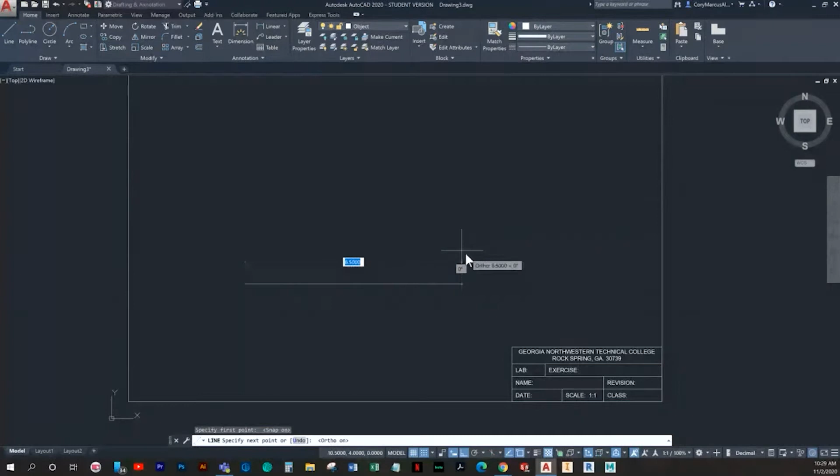We'll start about right here. Make sure ortho's on. It's going to be 11 units over, but because it's a 1/2 inch, you can say it's 11 divided by 2, which is 5.5. In that same vein, we know it's 6 up, aka 3 units.

I'll draw that little cutout in a minute. We know it's 2 from the end, that slant on both ends, and it's 3 over to here. I'll just trim out the excess so I don't have to waste time fighting my snaps.

Okay, so the next part says to use linear dimensions and then aligned dimension as well. So we'll just dimension the straight lines first, and then the last one we'll do will be that aligned value.

It does say to change the dimension decimal value, so we'll go ahead and do that. I went to the annotate panel, hit the little arrow, modify, and then in primary units we will change that from 0.0000 to 0.00.

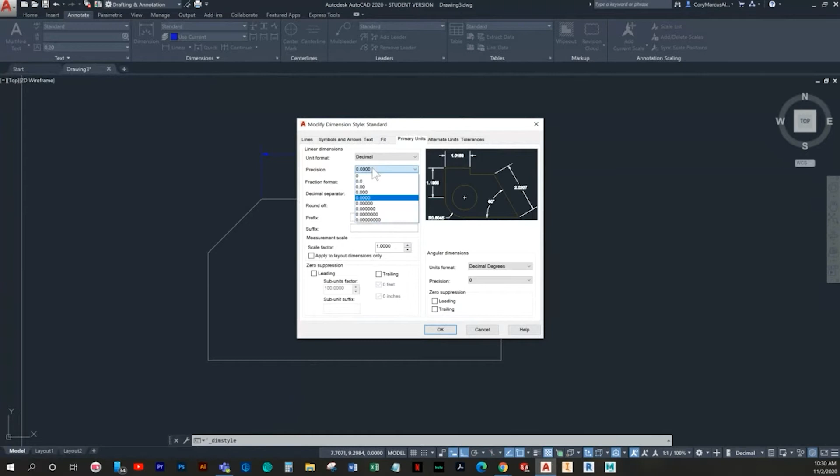Now as we slap these in, they will have the proper decimal value. I'm just going to go through and slap these in, and I'd advise, like I'm doing here, snap to the other dimensions to keep them perfectly in line. It's a little more clear when you're taking the time to actually align things.

So then we've got this value, and yeah, that's actually it for exercise 1. Let's flip on over to the next one.

This one's going to be covering baseline dimensions mostly. In the same vein, we're actually going to do more grid drawing, so I'll do the same changes again and do 1/2 inch here. We've got the 1/2 inch there.

Turn on your grid snap, and let's start a little further over. Let's do 4 again. Okay, so it's 3 units over, 1 unit up, 3 over, 1 up, 4 over.

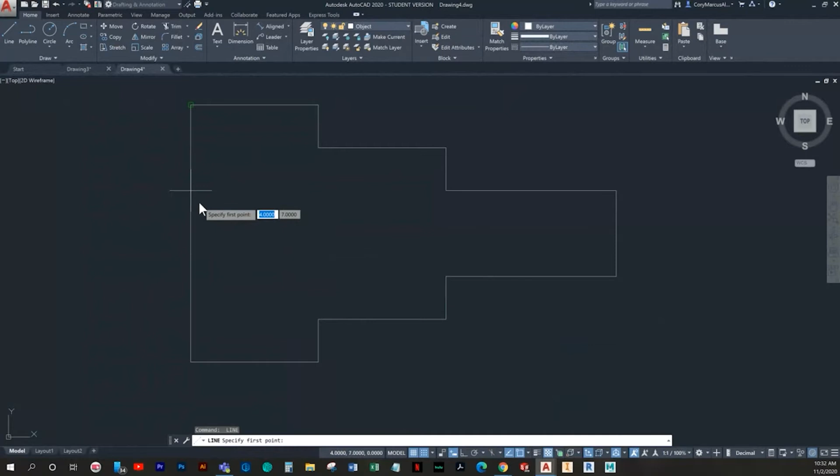Okay, and then we have from the middle, which if you don't have your snap set right, you may end up getting that midpoint nonstop, or endpoint. That's okay, you know what, we'll start one over and just trim it.

So from the edge here, it'll be 4 over, 2 down, and back across. So now I'll just trim this.

Okay, so then we'll do the points, which are 1 over, and change this to hidden. Let's see, you know what, I didn't realize it, but this line should extend all the way across.

Okay, so now we'll do our center line. I'm going to turn off the snap first, it's getting a little irritating. I'm just going to choose 2 lines. I'm still going to have to manually adjust it, but now it's a great time to have midpoint.

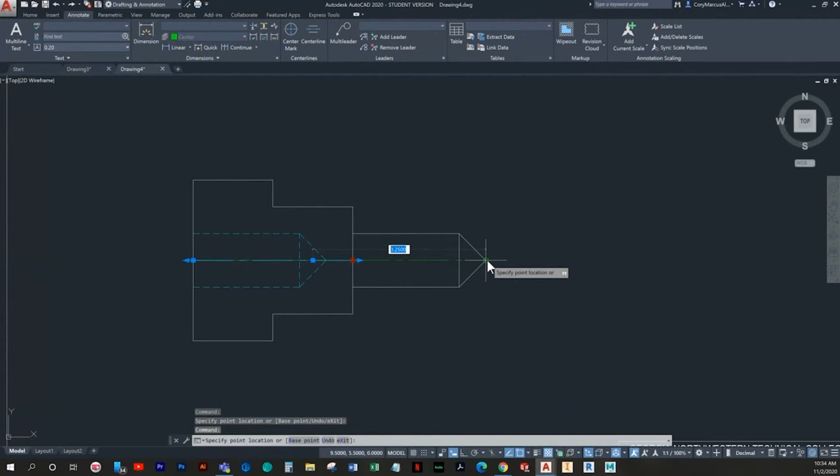So make sure you're grabbing the square grips, pull those to the end extents of the part, and we will be doing baseline dimension here.

Which I'm not seeing, let's see if it's on the annotate tab here. There we go, okay. So it says dimension the top half and bottom half, basically.

Okay, so this will be our base one. Then I believe we'll just choose this. Okay, that's fine.

Select base dimension. Oh, you know what, I believe you have to add one first. I'm not going to use this one a lot in AutoCAD, pretty clutch in Inventor though. I used the wrong layer.

Let's change that, okay, baseline. Yeah, okay, so once you have put down a dimension, then choose baseline, it automatically grabs that first selection. And then I can click here, and here. Okay, and hit escape.

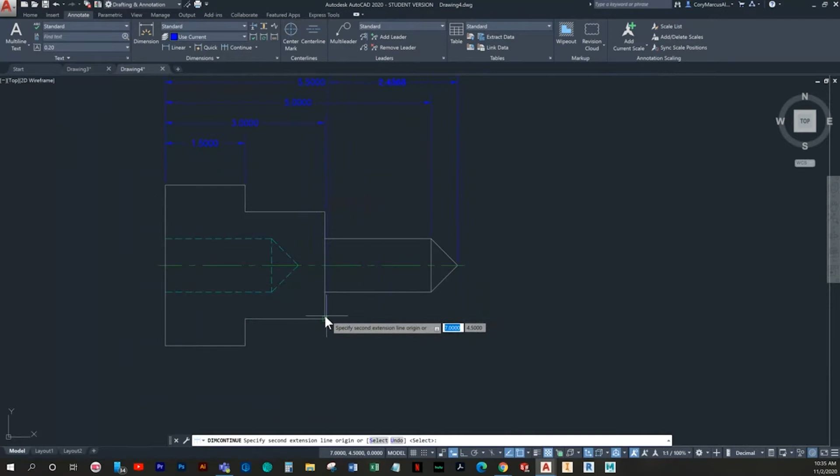And then it says to use continue. I can't say that I'm actually familiar with it, but let's see how it works here. We can just click here, here, here, and here. So I did them all on the top, let's undo that.

Okay, so how about we do another dimension like we did before. Let's do continue after that. Yeah, so once you hit continue, what it does instead is it dimensions the next portion. We can click as we go, doing the same process down here.

You're not really supposed to dimension the hidden lines, but if you want to include that, that's fine too. I'm just going to slap one in here generically so it's out of our way. I'm not going to nitpick how you go about that one.

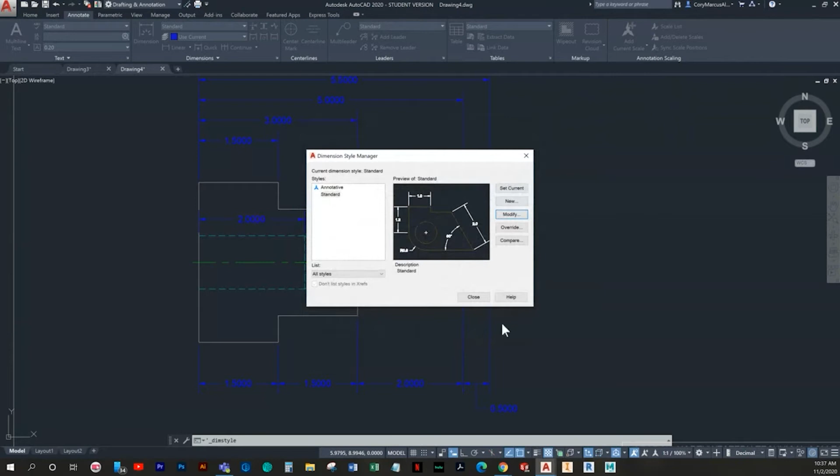I actually don't really like dimensions being on the model either, but since you have dimensions on both sides, you're kind of trapped here. If you want to change the units to save a little space, 2 units is clearly fine. Really, 1 unit's fine because you only have up to 0.5 regions here. So that looks a lot better, obviously, versus that.

Okay, moving on. We got another grid drawing. All right, so exercise 3 is going to be the same way.

So we'll start over and do the snap settings as we did before. Oh, but you know what? Now that I'm looking at it, we actually need to have our snap spacing able to go down to a half unit because technically sometimes these lines are 1/4 inch apart instead of the 1/2 inch that our grid is. Okay, so let's put on our ortho.

And we'll start it, let's see, how about at 4:4. Okay, so we will do 5 units over, which is 2.5, and then it's going to be 2 units to the right. Make sure your polar's on. And then 1/2 unit up.

I know if you're having problems with the snap, in the past I've had issues. Sometimes you need to turn off your object snap tracking because it wants to project all these different things. And if you're having issues still, turn off intersections. This one I've turned off because in the past I've struggled with it. Sometimes AutoCAD thinks it knows what you want, but it doesn't.

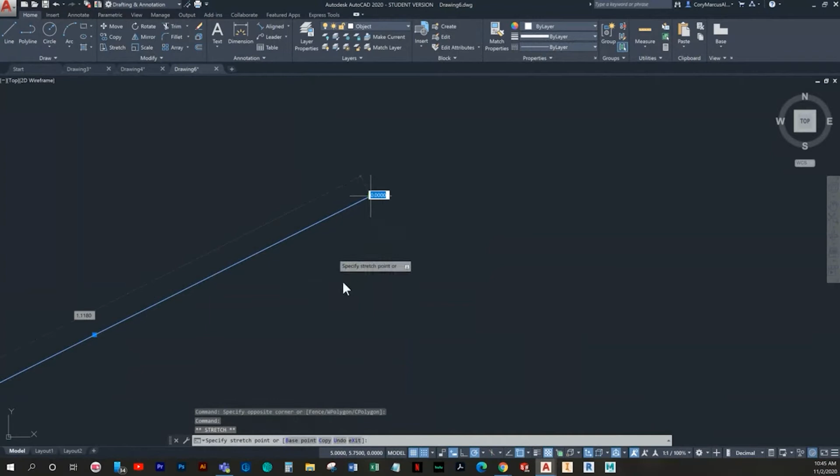I always double check. You see what happened there? Same thing I was just talking about. It wants to just do what it wants sometimes. For the sake of testing, I'm going to move this out of the way. Let's see if it would snap right to it. Yeah, so check those angled ones.

For whatever reason, it's easier actually to start here and draw over, because then it can't try to project it based off your earlier line. But sometimes there's some quirks, the system's not perfect. We'll do 1 over, 1 unit up, and that's going to be the first portion of it. We'll mirror the rest of it after we do this.

So we'll jump back over here, and it's going to be 1 unit up, and it appears we may have the same problem. Keep an eye out when you're looking at your dimensions. Mine was showing 5.006, which means that it had already snapped wrong. Be very cautious drawing these slanted lines.

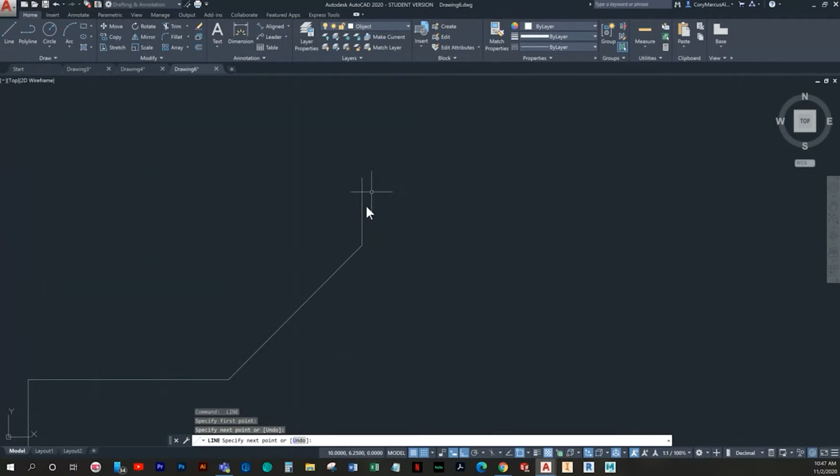So that being said, I'll jump back into it and go 1/2 inch over and 3 units over. And I'm going to play it cautious. Instead of trying to draw and it potentially ruining my life again, I'll start over on this side. So it's going to be 2 units over and 2 units up. So 1, 2. We'll snap, and then it's 1 unit up to the end, and this line should connect perfectly here.

Now this isn't the center. But what I can do is mirror this portion across this line. Well, let's see, we'll have to mirror and move it, but still, it'll be less work. Okay, so I'll mirror it, and I missed the line, but that's fine. You can still see what I'm going for here. I'll delete this.

I'm going to move this into place. Sure, it wasn't perfect, but in the end, it does line up. We've got our line there, no duplicates. I actually didn't need that line I copied, but we saved from having to draw that whole thing again. Okay.

So the next thing we need is some angle dimensions here. First and foremost, I would definitely get the units to show 2 decimals only, if you don't have it set to that already. And hop on the dimension layer.

You know, actually, had I had the foresight, I would have put the dimensions in and then mirrored it, so I wouldn't have to do all that again. But, you know, sometimes hindsight's 20/20.

So we'll just slap all these in. Although it seems silly to do every angle, we'll do it to humor the book. Technically, there's really better ways to go about this.

I'm going to do complementary angles here, probably, just because of space. And it's still pretty gross. We'll do it like that. I don't like it, but, you know. Again, this is kind of a space-consuming way to go about it.

And, you know, depending on which option you choose first is what it chooses to flip. Actually, kind of like that. Let's see if we can do the same with this one. Yeah, let's do that. Not too bad. And I hate it, but it's definitely better than the other options.

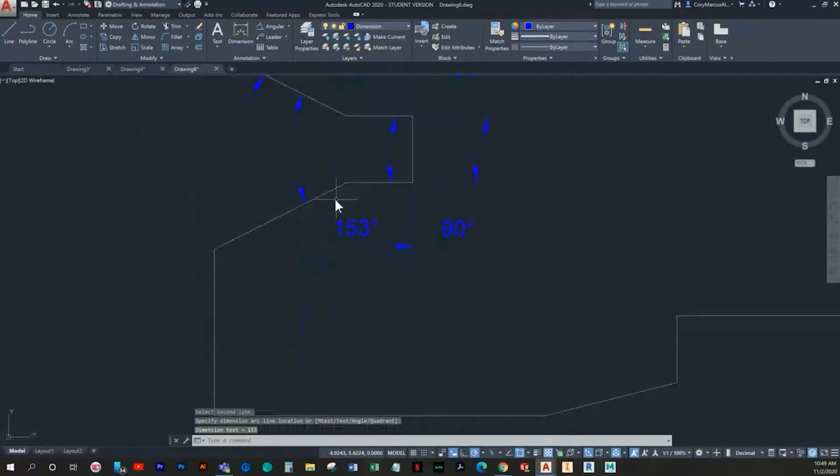Pretty straightforward, you know, just click, click. As long as you click those 2 lines, it'll give you that. And technically, you can use this dimension tool, and it would do the same. It's just it tends to be very versatile. So you get a lot of selections out of it because of that.

And I'm going to do a complementary angle here and do outside to save space. But you know, because that tool does so much, it'll snap to endpoints and midpoints, and it's easier for stuff like this just to go ahead and use the actual angle dimension.

Again, this is kind of a scene, but you know, we're committed to the rules of the book. All right, so there's all of our dimensions in all of their entirety. So let's see which one's next here.

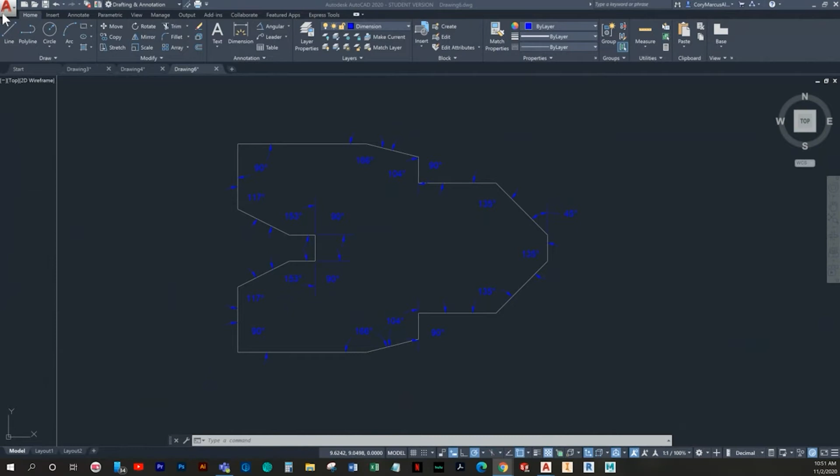Next we have exercise 4. And it's also drawn on the grid. Wrong template, that's okay. I like to do most of these on a B, it just seems to be pretty perfect.

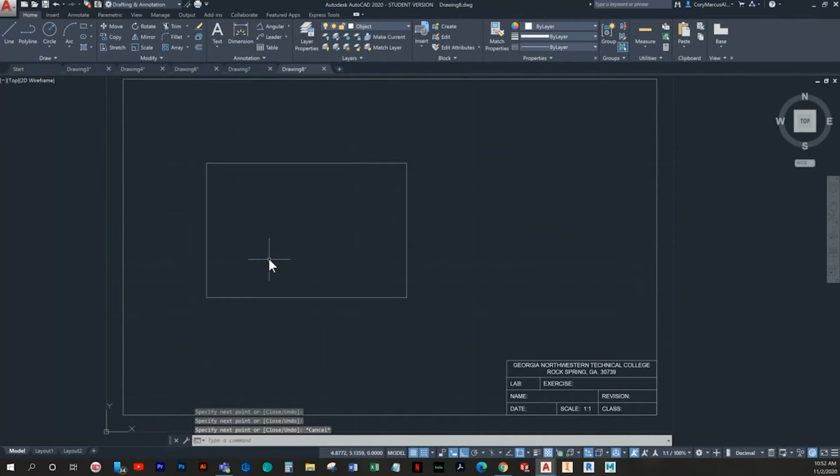Now we can draw our circles. This one is going to be 2 from each end. We'll just copy that. And it's going to be, it appears the same position everywhere, so that's kind of convenient.

I'll double check that. Okay, cool. And again, we need to have this snap set to 0.25 for these little holes. Okay, so 1 unit over from this end is the center.

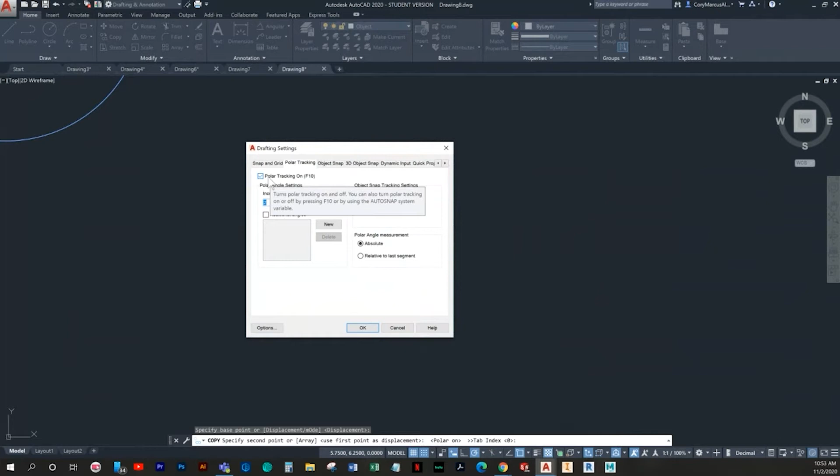So there's that guy, and then I'm just going to copy it down and over. I mean to tell you, this tracking is getting old. Well, we'll just turn off tracking for a minute.

How's that? Okay, so down and over 1. It's going to keep being down and over 1, so we can just casually click. And just to make sure that tracking is not messing with us, we'll just select each of these and go through. All of them look like they line up. Cool. Okay, so next,

it says to do ordinate dimensioning. And you know, it might be here. I like to try to stay on this panel if I can, just because this is where all your goods are. Specify feature location. Okay.

So this is going to be our starting point, I believe. Let's double check that and see though. Undo.

So I'm trying to specify these are our datum points, but let's just see if that works out as intended. So we just did, crap, I can't remember which one I hit. So this should be 4, 3, and that's 3, 4. Okay, so let's see now if it goes through and dimensions these like it should.

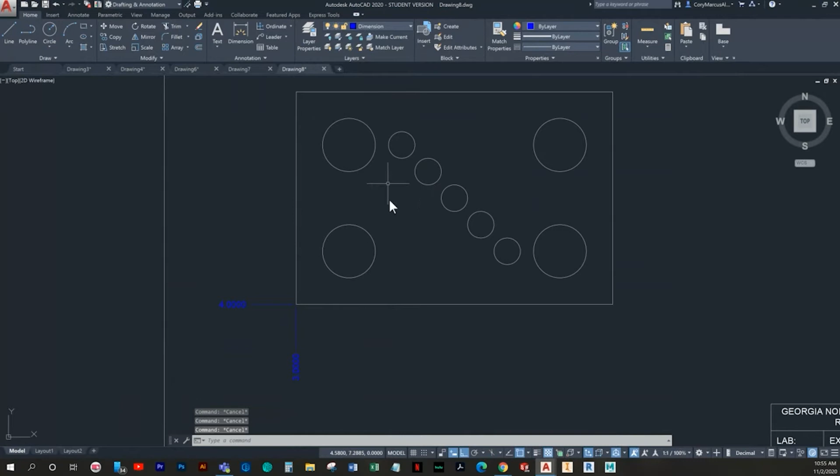Cool. Okay. So, one thing I would advise you to do, besides putting these on the correct layer, which I did not do, is to put center marks in. Ah, wrong layer.

You know, I'm actually sitting here thinking, I believe you don't even have to specify datum. I think I can choose here. And then if I immediately just go ahead and do another one, it does. Okay, so ignore what I said about those dimensions. We'll get to that.

But for now, put on the center marks. The reason being is, obviously when you're detailing, you shouldn't just have random holes. I know it doesn't show it in the book, but you've got to have center marks. How else do you know that it's actually a true circle?

So you could dimension it every time, but I'm not going to. I'm just going to dimension the essentials here. And granted, I'm putting most of these on the left because obviously people read left to right, so it makes more sense to have as much data on the left side as possible.

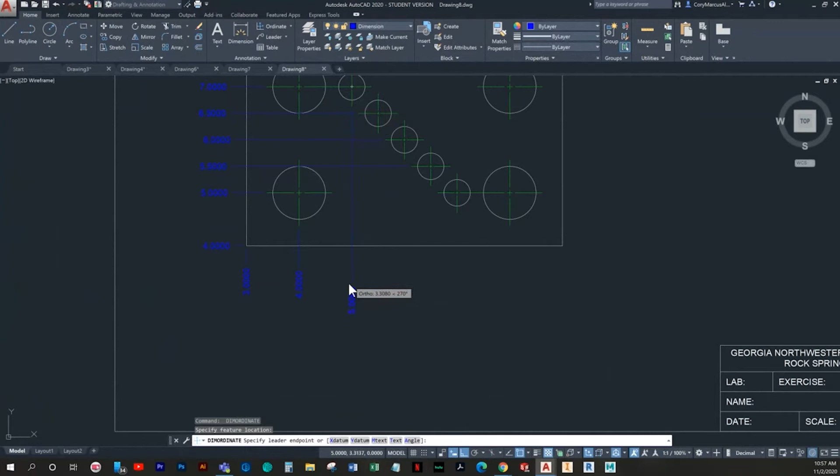Got to do this circle. Notice that I'm also choosing the ends of these points, not anywhere else. That's very crucial because if you don't, you end up having your layers overlap, and that's obviously a big no-no. So keep in mind what you're doing as you're doing it.

And to try to be fun, let's try a different command here. I've seen a few times this DIMDEC. You see that there. So what it does is it actually changes your layer style, I believe.

Maybe I have to select stuff first. Let's check. Nope, okay. I bet you what it does is it does it for a new one. Yep, okay, so that's kind of lame. So I really don't advise using that at all then.

I was trying to be cool, use something new, but yeah. All I did was create a style override. So what we want to do is change our primary units to two manually after, and that should fix that. It didn't, okay. This is why you don't use overrides, needless to say.

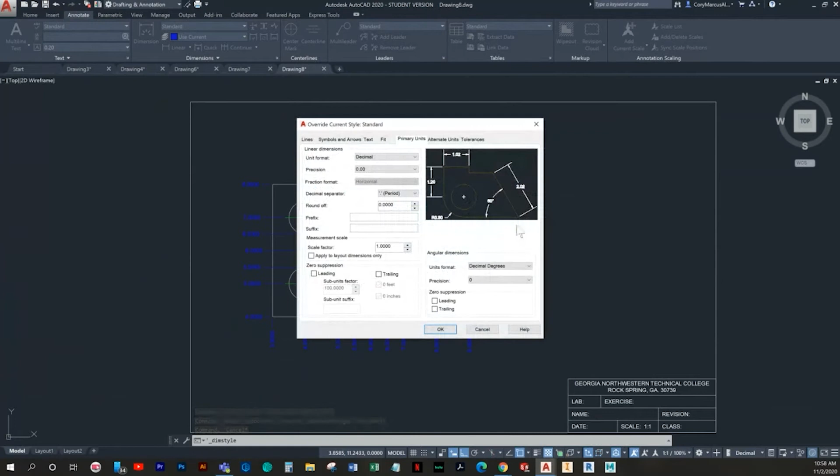Okay, so how to fix the override? Undo a few times here. Okay, don't do DIMDEC. Add stuff. So now I'm going to go in here, modify, how you're supposed to do it. I can't believe the book even mentioned that. It's terrible practice. So anyway, yeah, bam.

Now, I don't know if it says to, it doesn't, but you should dimension your circle still. So do that, and I'd preferably do it the right way. Put a quantity in there: 4 of those, and 1, 2, 3, 4, 5 of these. Notice the formatting there: it should read quantity X and then the size.

So there's exercise 4. So let's flip over and look at 6. This one is also going to be inches.

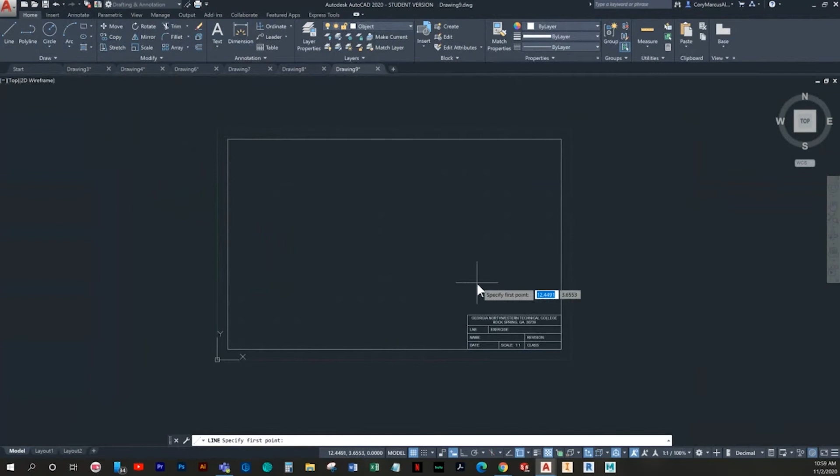Finally, we're not using a graph. It shows it, but you don't have to actually use it. I will use it just to get my location here. I kind of like 4, 4. We're just going to keep committing to that until we don't have an option there.

All right, so we've got a 5x3 rectangle. If you've been doing the same as me, you should turn on your polar tracking now, or your snap tracking.

The way it likes to locate everything is through center lines, so I'm going to do some generic center lines for the sake of construction. Then we know that each of these 4 circles is 1 inch from that center, so 2 inches between. And then it's 0.5 from the center to the other part of that circle, aka 1 total. I'll delete these to make it a little more clear.

These are going to be diameter of a half circles. And we'll need our intersection back on. So now I'll copy it and paste it around.

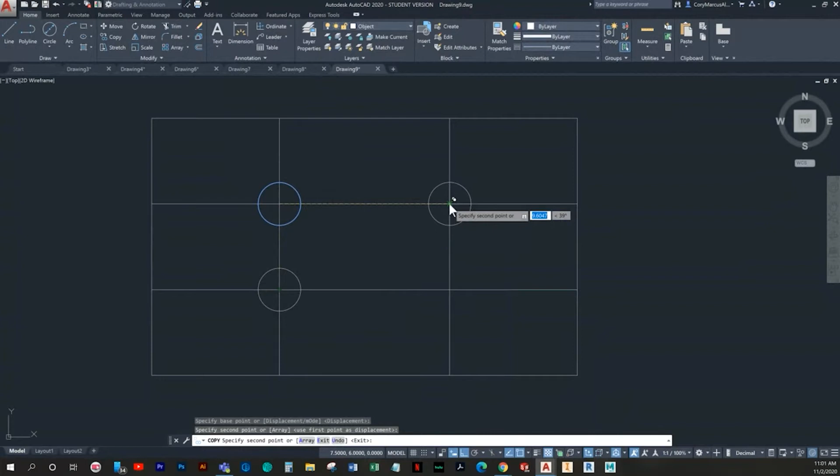And I already deleted our center line, so we'll just offset from the outside to get these other circles. 1/2 inch, because it's 2 inches from circle to circle. So obviously 3 minus 2, divided by 2, equals 1/2 inch here. And it's actually going to be 1/2 inch the other way too. Isn't that convenient?

And unfortunately, I drew these circles the size of what the other one should be. So we will use 0.25 diameter circles here.

And once I draw one there, I'll just move it over, I guess. Kind of inconvenient, but I haven't drawn these before. I'm just doing them on the fly.

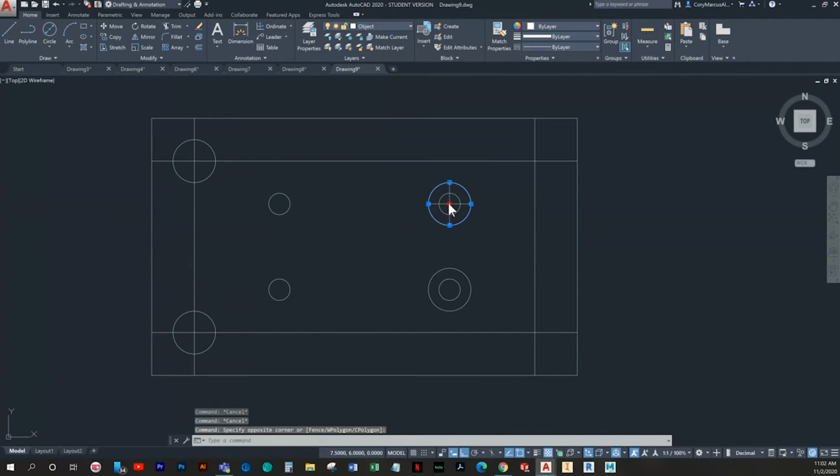So once you get those little replacement guys in, put those in. And then we can delete out this junk. Okay, should have noticed that. That was my bad.

And instead of having to redraw this line, we're just going to use the projection here. Let it snap for us. And that is 1.

Okay, so at this point in the game, you do not know what thread sizes are. But what it's calling out there is a thread call out, which is why you see a second circle on top of it.

You don't know anything about roots and crests and all of that. So for now, I'll just put a generic dimension of 0.375. When time comes, we'll talk all about threads and you'll understand what it would actually be. But this is a nice placeholder and it looks like it'll appear fine.

So we'll change these to hidden lines because technically there is a thread in there, and you would see it as a hidden line. So a little big, but it's an easier number.

I guess I could try one more just to see, but 0.3125. That'd be a little better, I guess. Okay, so take it back. Let's do 0.3125.

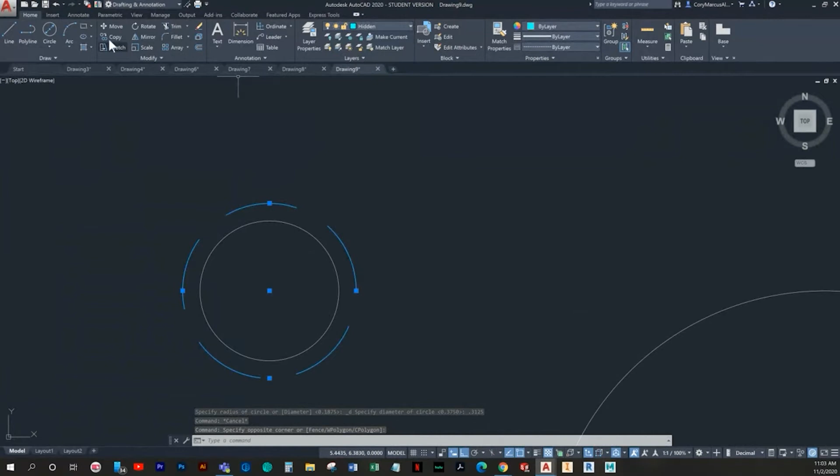So we'll copy it. Okay, that's better. So now we'll do center marks.

We'll still use the biggest circle in this case. You always want to use the biggest. So choose the hidden lines. Okay.

Now to dimension. So we want to dimension just like the book. So we'll grab these endpoints of the center marks.

And let's go ahead and change the dimension values here. It appears that it varies between 1 and 2, but we'll just set a blanket value of 2. Just that'll cover everything, and we can adjust it to match after. So got the 2, and then we have 5.

We have the 1 dimension, 2, 4, 3. Let's see.

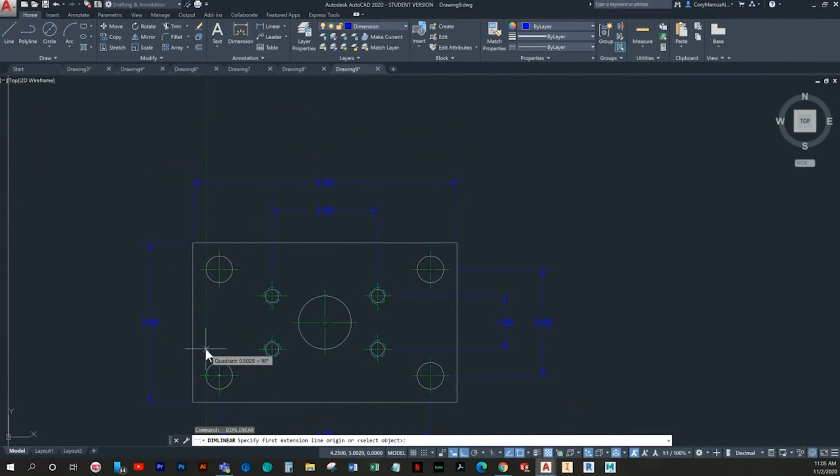That's pretty much it. Okay, so what it says to do for these is to do a QLEADER. Now I have one problem with that, and I'll show you just an example.

What I would rather you do in order to give some actual substance to what you're detailing is to dimension it. And then in this case, you actually retain some information too. So we can then type in drill and ream. I can't tell for spaces, but we'll see.

And then we can do alignments if needed. Let's see, it would be middle right. But so what you get out of that is this value, like it's giving you a true value. You're not having to type it in and mess it up. You're not having to cheat the system or anything. It just is what it is.

And also, placement wise, as you know, the dimension always stays true to that axis. So it's going to always be positioned well. So what I would rather you do instead of doing a QLEADER here is to actually go in and dimension these like you would normally.

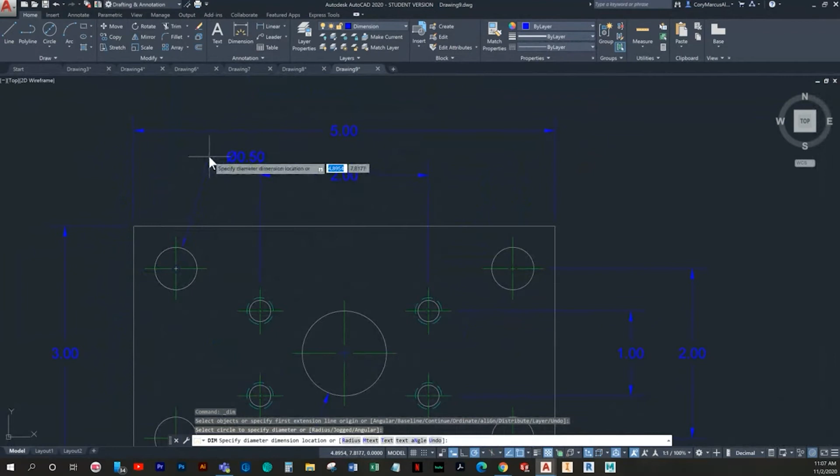And notice I'm using a dimension tool. It's kind of quick with these. But then go ahead and just type in that information. And all you need to do is make sure you don't have this portion selected.

Notice it's dark colored. When I hit left or right arrow to get away from it, it goes live. So if you're having problems with deleting it, just make sure that you aren't on it. When you edit it, by default, it's not on it. It's when you click to try to type, because you don't want to type over and then lose that dimension. That's no good.

So we'll undo that and then type in again, drill and all caps. Don't forget, drill and ream.

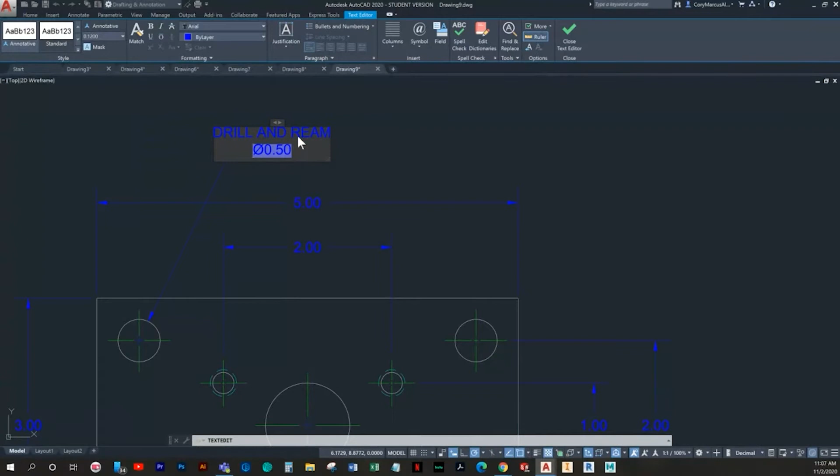And then this one has the quantity 4 times and that. And you know what, this one's also going to be middle left.

And then we've got this guy. It's hard to tell, I think it's dimensioning this one. Actually, it'd be preferable you dimension a small one anyways, because otherwise you're going to get that 0.3125 dimension.

So, drill and tap. In case you're wondering, tap means to actually add thread into a hole. We'll talk about that more later, but it's good to know what exactly it means when it's using that jargon.

Let's see, do we have a space there? Add a space... okay, actually there's not supposed to be a space, my bad. When you're looking for that symbol, you just choose the symbol drop down, choose GDT, but I already did it. This is the font where all these special symbols that drafter people use is going to be. We're looking for a little... there we go, that guy. So we'll select it, and then it's going to give us the option down here to copy it.

So then I will paste using Control V, and then type in 0.5. Now do you see what happened here? This all is Arial font, but unfortunately this part shifted to be GDT. You have to be careful when you're putting these symbols in to keep your font the same, because it looks funny. So a lot of people, what they'll do is they'll add in these symbols after they're done typing to avoid that. But if not, make sure you're going back and changing the formatting to match this over here.

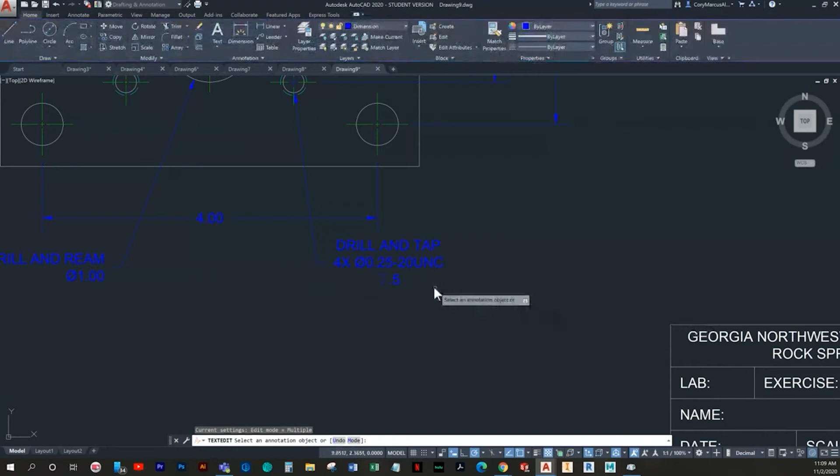You also need to change both of these to be 0.12. It's kind of a quirky thing, but you really do have to be very cautious with that, because for whatever reason AutoCAD's just not really intuitive enough to do that on its own. So, and you know what? This one is also left center, left, whatever.

Okay, so hop on over to exercise 7. This is where the fun begins. Not this one necessarily, but the back of the book exercises are always a little tougher.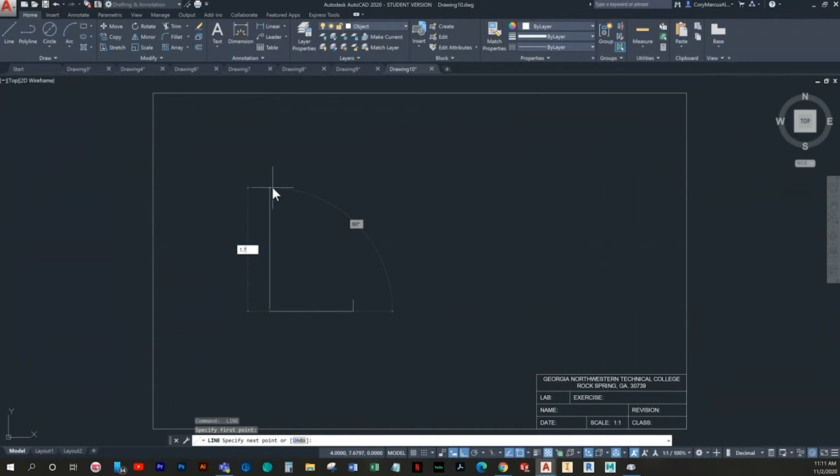Okay, so I'll use the grid to get a placement. Let's go with 4, 4. I think I really am committed to that for life. Okay, so 2.5 over the entire width, 0.35 up. And let's see, I'm going to jump over here actually and just do the overall height of 1.7. 0.5 again, 0.35.

Now we can go ahead and finish our V-cut. So snap this guy to this 45, 90, 135, 180 - make sure you're getting that perfect snap where it pops that little dotted line across. And we'll just draw it until we think it'll extend past the other slant. And the same thing.

We'll trim. And it's probably a good time to go ahead and confirm, is this 90? If you're super worried that you drew it poorly, you can always put on max decimals - it'll always show more then. Okay, so now we will draw our hidden lines across.

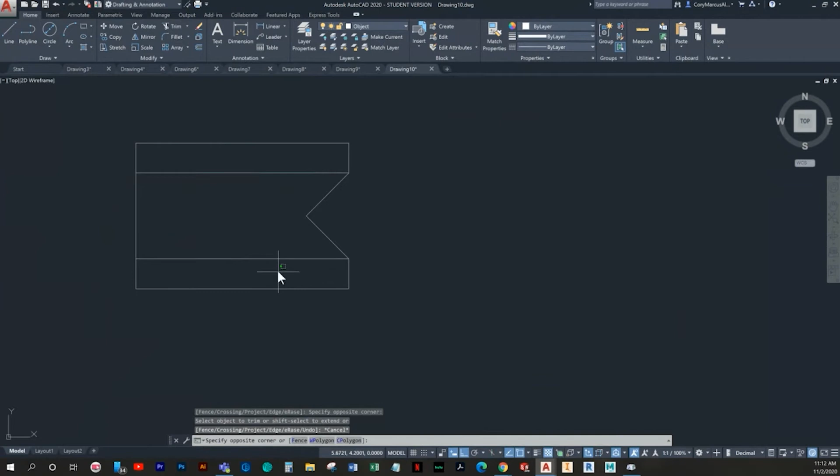And then we have one circle that is 1 on this end, and a circle that is 2 on the same end. I'm kind of lazy, so I'm just going to extend these a little bit. I'm going to do it the entire length of the part, so that way it's centered though.

And then we have diameter values, so this one is 0.58. This one is 0.38. And then we need some fillets of 0.25. Oops.

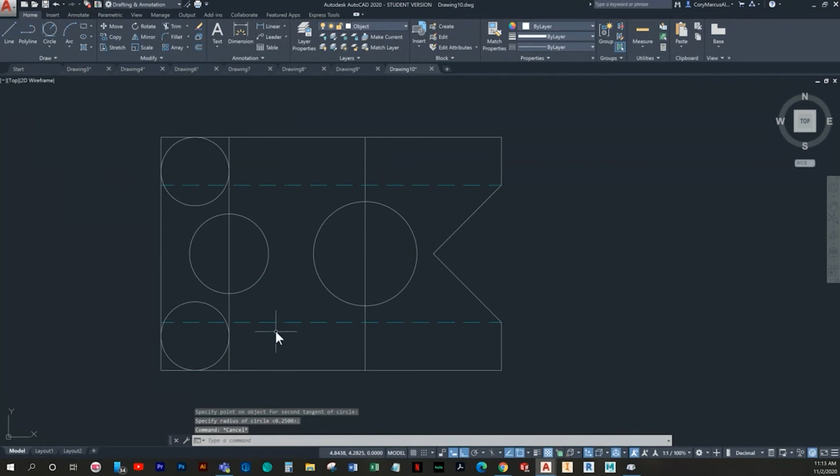Okay, first and foremost, let's delete these just so they're not in the way. Let's trim. Make sure to get this little guy - sneaky, I tell ya. Alright, let's put in our center marks.

And let's dimension it. Alright, so again we'll match the book. So we've got this value. Oh, you know what, I did a radius earlier, my mistake.

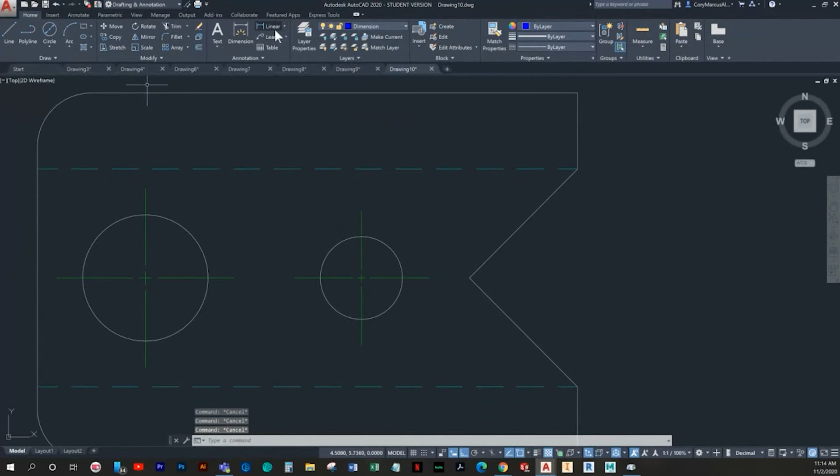So, I tend to use the repeat command. But if you use repeat on a diameter circle, unfortunately it reproduces it as a radius. It's a common mistake, and you'd think I would have gotten used to it, but I'm really just waiting for AutoCAD to fix that problem. It does the same thing with a tan radius even - if you hit the space bar to repeat, it'll actually make a radius circle. It's definitely not helpful, but what can you do?

Okay, so anyway, slapping in dimensions. And let's go ahead and change this again. Our primary unit amount, we'll change it to 2 decimals to match the book.

Alright, so we'll place this dimension for the third time. This would be a great option for the baseline dimension, but I'll leave that to you to decide when to apply that knowledge. And then we've got this—it's convenient when it fits in that little bracket area too.

Alright, so we'll slap in an angle dimension. See, what do we need? Radius. Make sure you're putting a quantity here.

Alright, so that's it for that one. So the next one's on the same page, so that's pretty cool. But this one's metric, so keep that in mind. I guess we'll do 40-40. It's got to be pretty similar, right? No, it wouldn't be. Let's do 100-100 then.

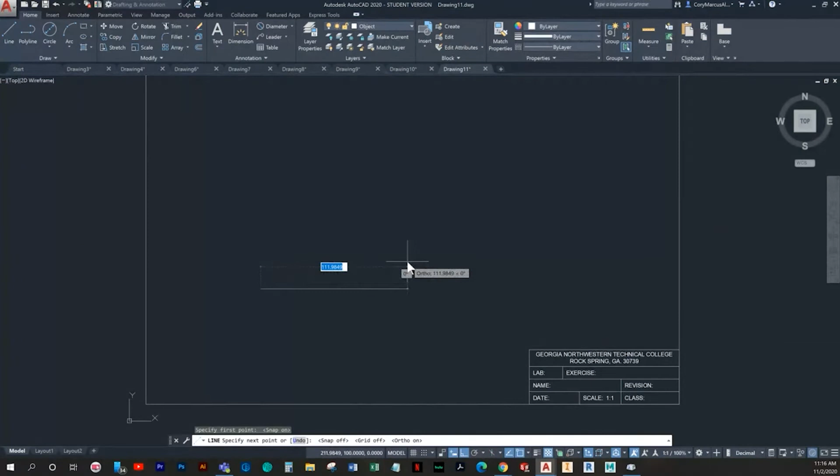Turn off the grid. I'm just going to make the full box, I think, but we'll see. So I'll start up with that left corner, 56, and then 52 minus 14, I believe is 38. Let's see. That is 38. Yes, we'll do 38.

And then, unfortunately, we don't know that height yet, so we will jump back over to this corner. I can click it and do 52 over, 37 up, and we will trim off the crosses.

Alright, and I'm actually going to extend this. I should have thought of that. That's okay.

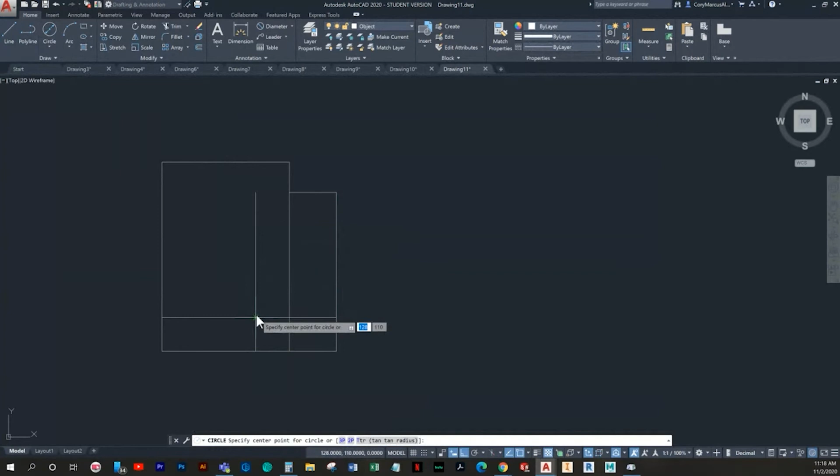And now we will go ahead and make that little circle, which is 24 from this end and 10 from the other. And that is a diameter of 9. We have a radius of 28.

So it appears that we're going to trim it here and here. Delete off the rest of this. Then we're going to have a horizontal line here. Trim off that. We can delete our circle location marks. Yeah, that's pretty much it actually.

So put in that center mark. This is one of those where you'll have to kind of manipulate it a bit, but technically what it's doing in this case is it shows it extend to here. So I would have probably just went the full length, but it's fine. We'll try to make it look more like the book here.

So, yeah, let's put some dimensions on this bad boy.

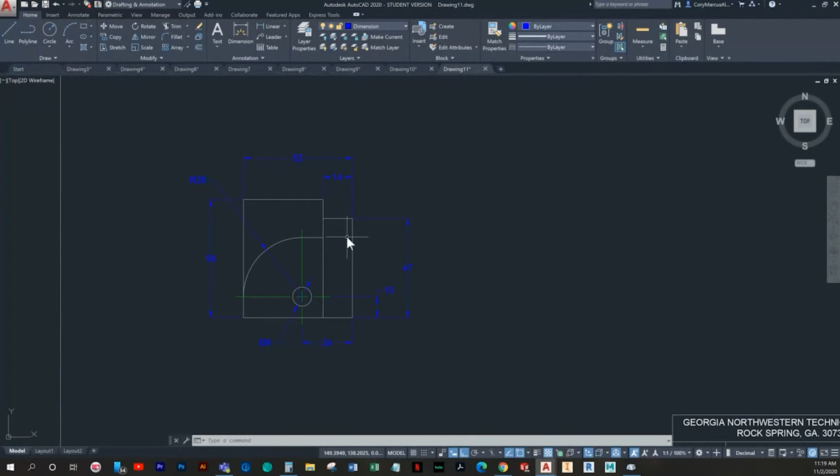Okay, let's see what's next. Boy, this next one is a doozy, actually. We'll still do a B. I don't know if we'll be able to commit to this, but let's try 4 of 4.

Alright, so first and foremost, it's 4.88 over. Then we're going to have a bunch of offsets, so let's just get into it.

0.38 for the majority portion here, the little closed-in shape. I'm gonna close my door real quick. Stupid fire alarm.

So I'll go ahead and close it out because it's going to get convoluted pretty quick.

Then we're going to locate the slot, and from that same edge is 1. So there's the first end of the slot, and from that slot line to the next is the other end of the slot. And then we have the overall height of the part, which is 2.38, which is again from the bottom line.

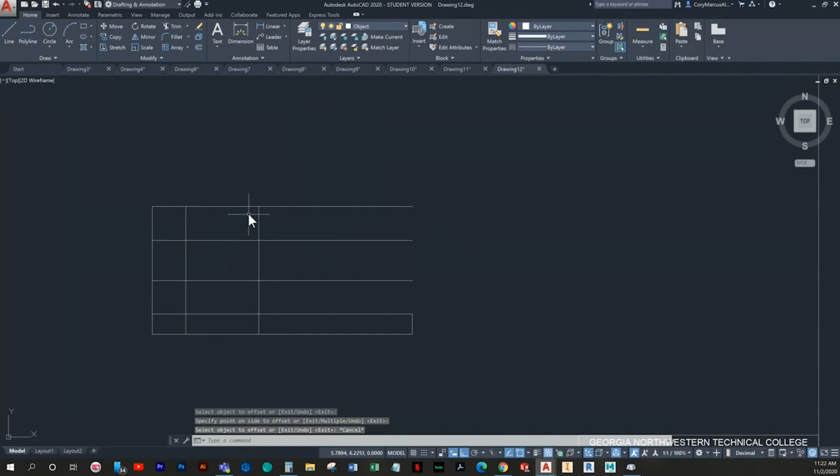The slots are 0.44 in width, so that means that it's a diameter value of 0.44. So I'll grab this one, copy it, do the other slot position.

Once we have this one drawn, we'll copy it to the other slot position. And we might as well detail it first, that way we don't have to do all that again. So we'll go ahead and do our center marks. I know they're hard to see, but that's okay. We'll get there with that.

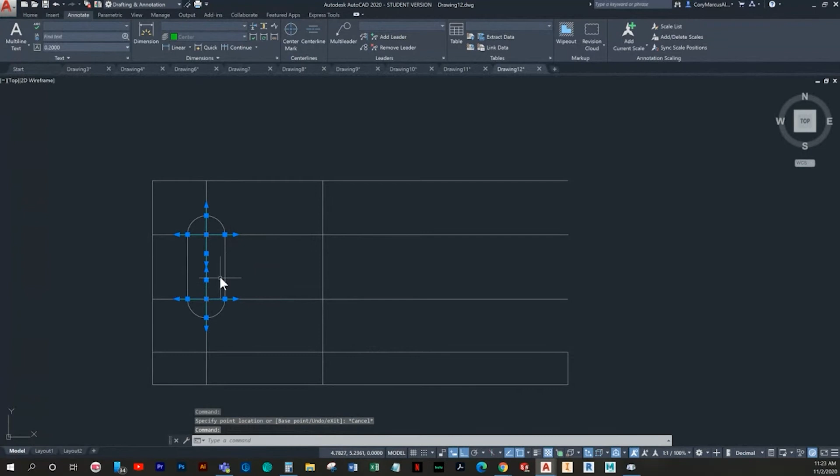Let's see where the other one goes. Yeah, okay, cool. You'll be able to see a little bit more of what I was doing after we move it. I can delete away the rest. Make sure you've got the center marks connected too, though. And we will do a copy.

Okay, so we can delete that. There we go. So you can see now what I did was actually grab the endpoint. I had to pull it closer anyway. Might be kind of hard without moving the snaps, but I positioned it to touch the other point, basically like that.

Alright, so now we can go back and put those holes in. 1.25 over, and 1 on the bottom. Didn't realize it actually shares the same lines as the center line. Okay, well that's convenient. So there we go.

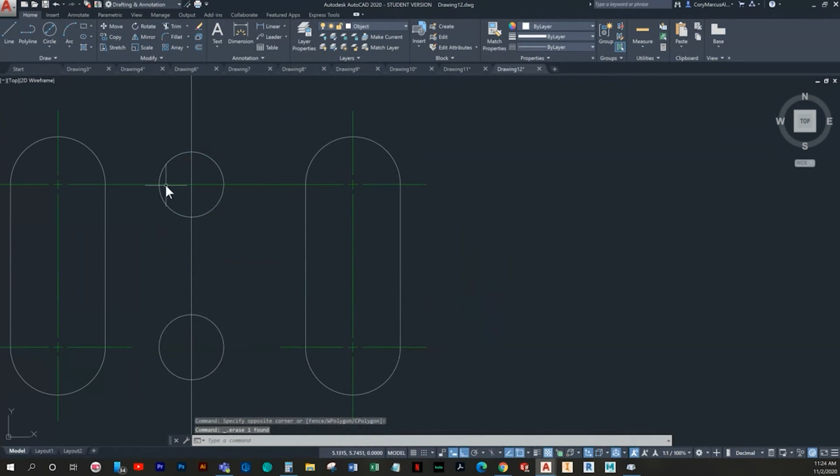Now the hole's dimension is on the far right because we have multiple of the same size. So they're going to be 4 times diameter of 0.3. Okay, so we'll copy it, delete off that guy, and add in the center marks.

Alright, so next, 2.63 from that left side will be the ending of this face. Then we have to offset 3 from that same side. And then it appears we need to trim here and here. Now it's starting to look like something, so we'll just go ahead and connect the dot here.

Trim that. Now this part is very crucial that you do it in the method I'm going to do. So in order to keep everything aligned to this edge, you have to offset. If you don't offset, as I've been doing with every one of these, you're probably not going to get them right. So keep that in mind.

So first we have 0.3 from this line that we need to offset. And then it's kind of tricky, but what we need to do is draw a line perpendicular to this line. Trying to see if there's a foolproof way to do this without confusing everybody. You know, I think a good method would be to just copy this or rotate it.

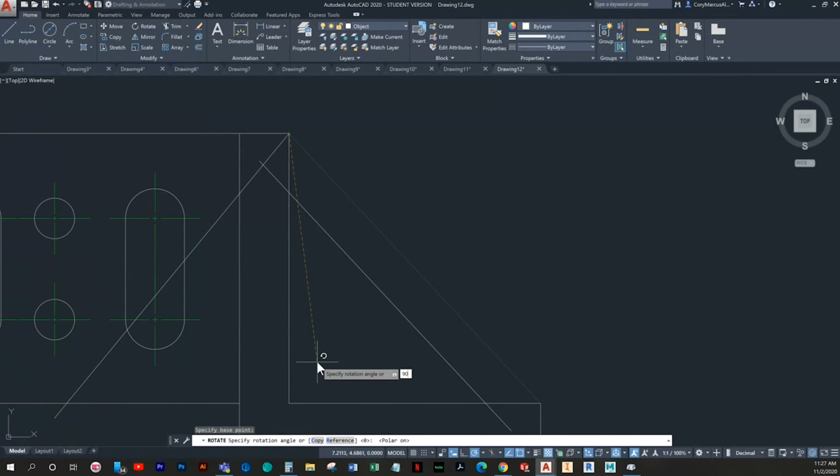Yeah, let's rotate it. It's gonna be hard to get a perfect way otherwise. Okay, so what we need to do is basically say 90 degrees. I don't know if it'll do minus 90. It did. Perfect. So minus 90 will rotate it exactly where it is. I just chose a base point and then minus 90. And just to make sure it's perpendicular, because that's crucial to this step. Good, dimension there, change of precision.

So now from there, let's see. Man, there's a lot. Okay, so let's do the small hole first on the top. It's going to be an offset of 0.77. And then let's do the next one, it'll be 1.37, from that same first line. Oh, it's actually 0.97, I was wrong.

Okay, so let's do those holes. I'm actually just going to copy it all. Definitely a fan of the old work smarter, not harder concept. So we'll commit to that, and we'll rotate these in a minute. Okay, so we can go ahead and delete that part out to make room for this slot. So now it's going to be a 1.37 offset.

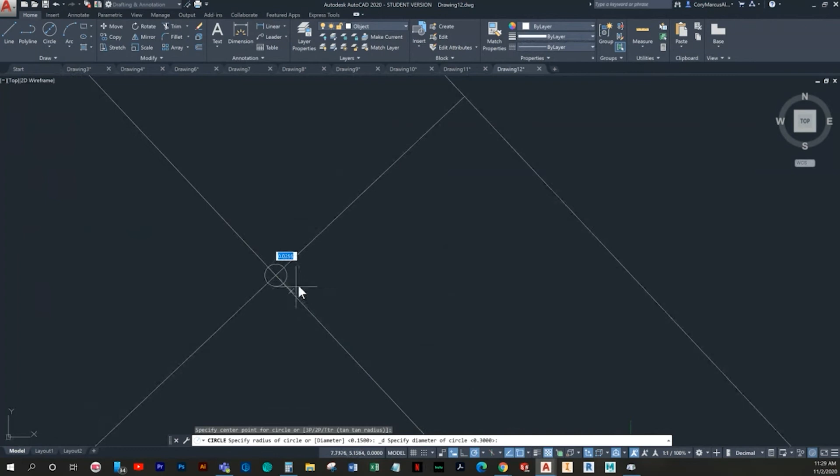Then we need to offset 0.69 from this edge to the other end of the slot. Actually, no, from this slot mark. This slot's a little smaller, so it's a diameter of 0.3. Be very careful, if you notice, it was trying to snap to the midpoint. Zoom in, you need that intersection right beside the midpoint in this case. So the diameter 0.3.

We'll copy that. Same deal, be careful if it's snapping to the wrong thing. If you turned perpendicular on earlier, turn that back off, it's useless. Okay, so this is one of those where you're really going to have to be mindful of your snaps again. So we'll trim off this, that, and this.

We can go ahead and ditch all of this actually. So we will slap in our center marks. I know we're about to rotate all of this, you need it to be aligned.

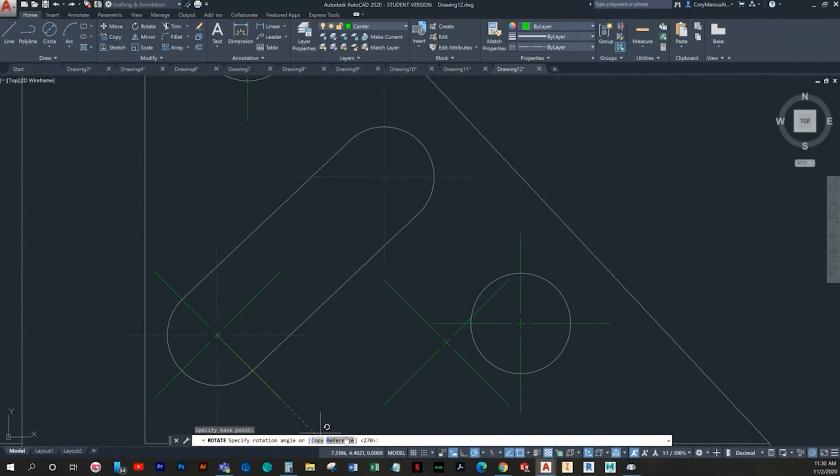Let's see, let's test a good way to go about that. Let's do this as a base point, and let's do maybe a reference, well let's see. Is this exactly... if it's perfectly like a 45, we won't have to worry about something like that. Nope, okay. So let's do a reference rotation.

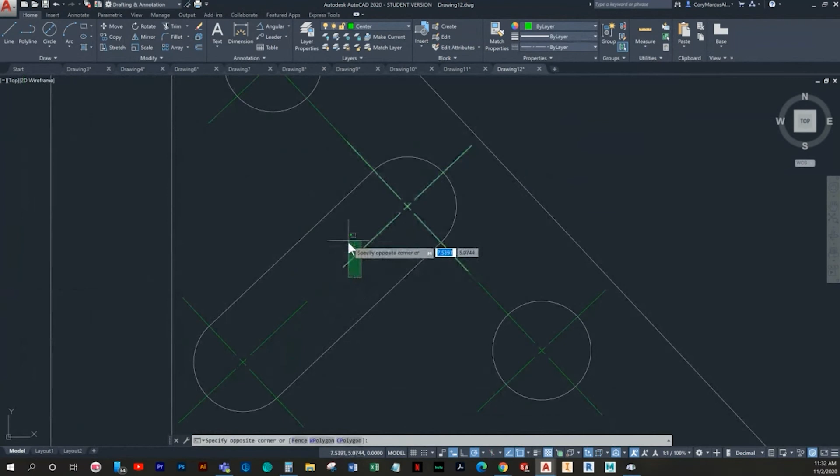But anyway, I'll extend this guy. And we finished drawing it, but now we've got to detail it. I'm definitely going to change the decimal places. Looks like we can do two decimal places, so let's do that.

Alright, so we've got a 0.63 dimension. And then we've got a 1.25 dimension. You know, I didn't realize it's laddered perfectly. So we actually could have done a baseline here.

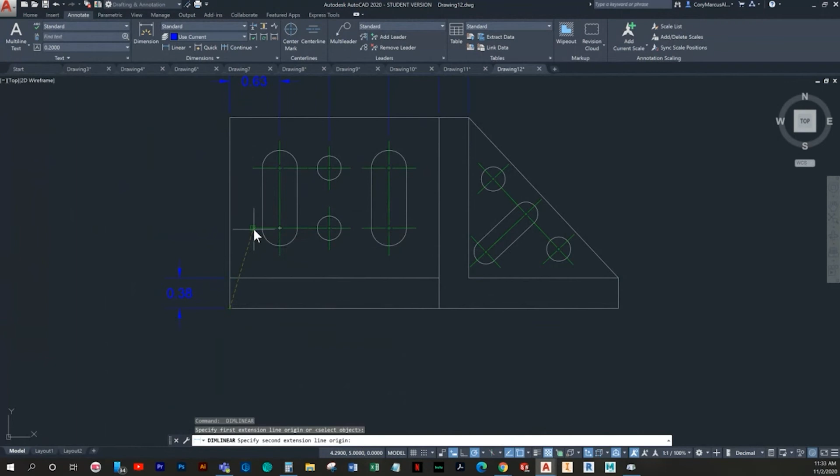That's okay, pretty quick to dimension them still. You know, if you want, I think I'm going to do it. You can actually go ahead and extend these lines as well, just to show that everything's in line. Because see, the thing is, technically, yes, you can tell that because there's only one dimension, but it's nice to know, like, hey, these are clearly all tied to the same dimension value. It's just a little tidier in my opinion, but you know, there's a little creative freedom with drafting. As long as they can get there in the end, you know.

Alright, so there's that. Before I forget about this corner, let's go ahead and do the slot and holes.

So now it does just say, you know, like 2 times our slot. Why would you not give that information if you have it? Let's keep that. Let's say 2 times that, 2 slots. You know, never withhold information if you have it, by all means. The more the merrier for people when they're trying to make this.

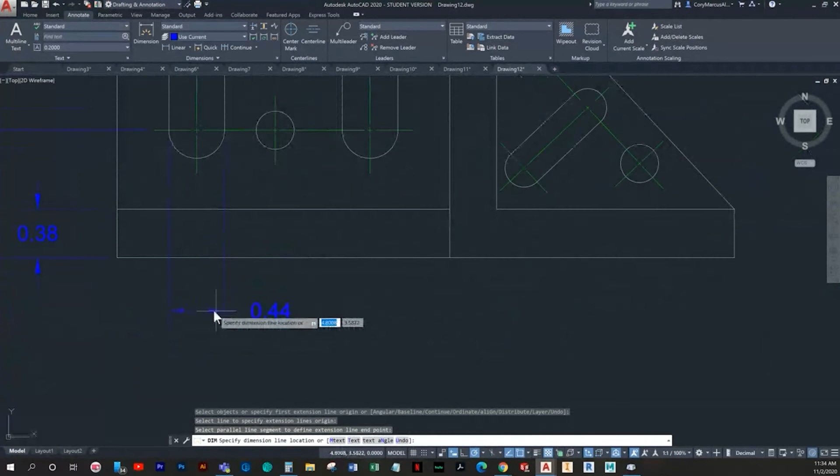Okay, so then we have a 0.44 dimension. And we'll jump over here. So this is where we're going to learn a cool little thing called dim break, actually.

This is going to be a bit of a pain to detail because everything's slotted, so you have to use an aligned dimension. So first and foremost, we'll do this one to this one. Granted, you're going to have to kind of use some projection too and get intersections. It's going to be a bit of a pain, but you know, it's fine.

Make sure you get an intersection there, and obviously if your dimensions don't match the book, you've either drawn it wrong or you've detailed it wrong. So make it match. I'll pull this up a little bit. It's a little convoluted in here, so a little more room never hurts.

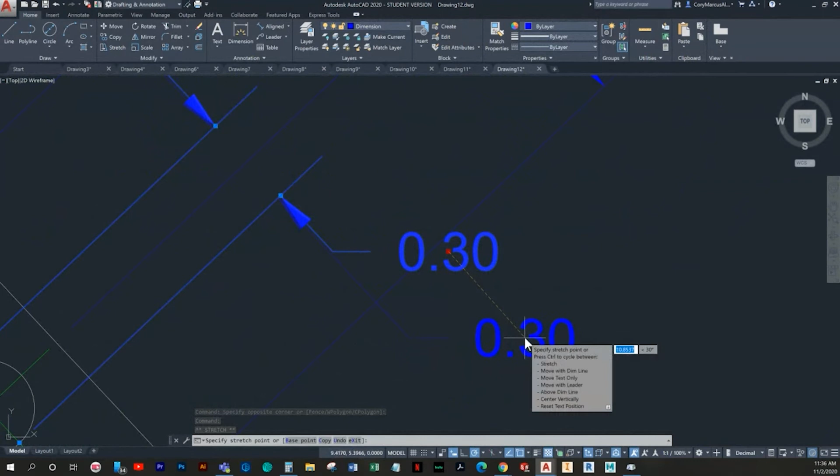One thing I'm not a big fan of with AutoCAD is it tends to not be great at dimension spacing. So then we also have this value given here. And it's clearly not going to be very tidy, but what can you really do? So we could shift this over a bit. Okay, cool.

So it's the next ones that end up needing to be dim broken. You'll see what I mean. So we've got first and foremost from this center point to the intersection here. If it finds it, come on. Sometimes you really got to work with this projection.

Makes me wonder if I've got my angle right. Dude, what the heck? I don't want to snap to it whatsoever. But yeah, that's right, okay. We'll just start from here. Okay, so we've got the 0.3.

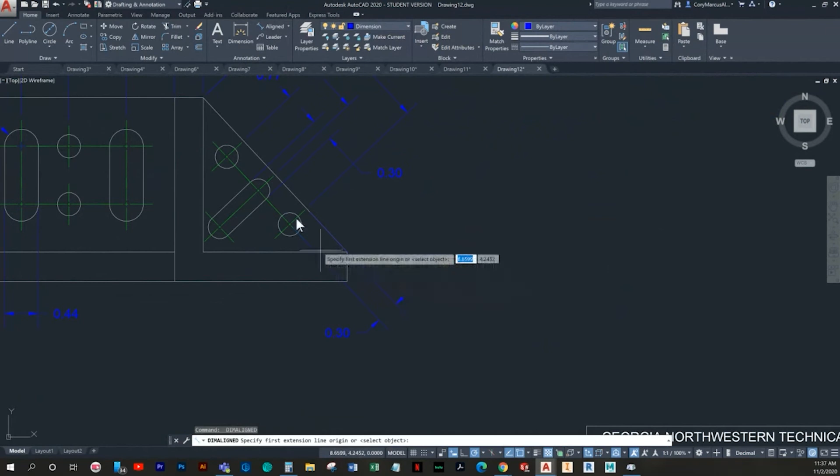Then we have... don't be fooled by that midpoint, that's not what we need. I'm just going to turn it off for the sake of not messing up. Okay, so we've got the second one down here.

Forgot it's from here to here. Oh no, maybe we won't need the dim break. Oh, okay, we do. There it is. See that blue overlap?

So let's go ahead and fix that. Same with here. So what happens is sometimes you don't have a choice. You have to dimension here to here, and you end up with this line cutting through all kinds of stuff. But obviously we don't want that.

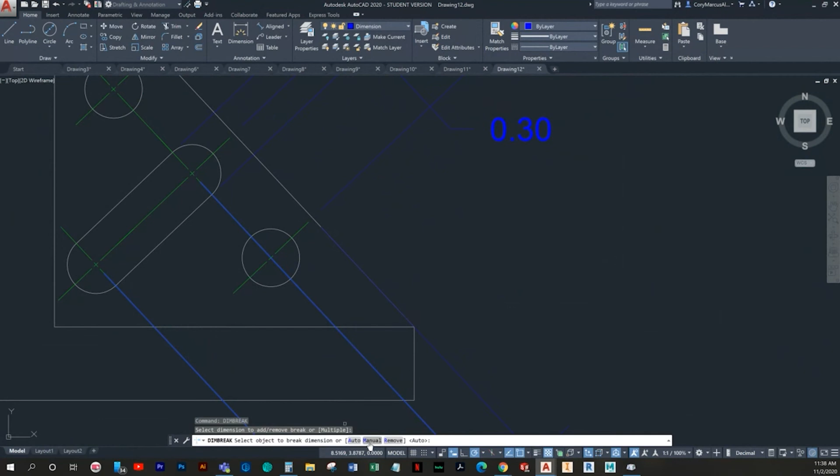So what you do is type in dim break. Choose the dimension you want to break. And then you can try different things, but most of the time in something like this, you need to choose manual. So you're going to choose the endpoint of the center mark, as it's kind of hard to see. But then I'm just going to choose to the end of that dimension. So what it does is it breaks it.

In this case, it didn't break enough, but I think that's because we have two on top of each other. So as you see, this one needs breaking. The other one actually did break to the end of that center mark. The perk of that is it keeps that little gap that you're supposed to have between stuff.

So let's go ahead and do another one. We'll break this dimension up here, and we're going to choose manual, and we'll choose the end of the part, what appears to be, I don't know, something like this, the end of the line. So now it deletes it. It leaves that little gap in between, even though it may not be very easy to see.

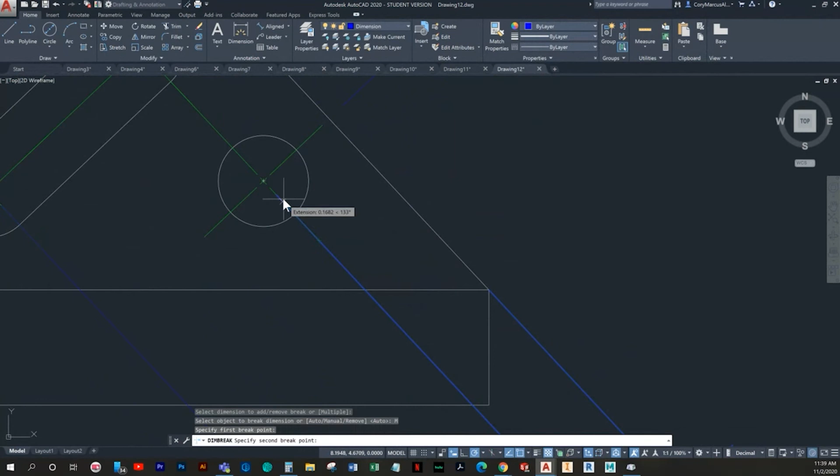And we'll do that again. Choose this dimension again, manual, and choose the end of the center mark to the center of that center mark. Cool. So now we only need to do one more. This guy, manual.

Okay, so now you don't have that line overlap. It looks a lot tidier, and obviously it's correct in that form. So now all we need is an overall width.

Now you see why they put these dimensions so far out. A little heavy, I'm gonna move this down a little bit. We got plenty of room, so why not, you know? It's about right there, a little bit higher.

So then we dimension this radius. What the heck, right? Might as well leave that information there. We'll just do 2 times.

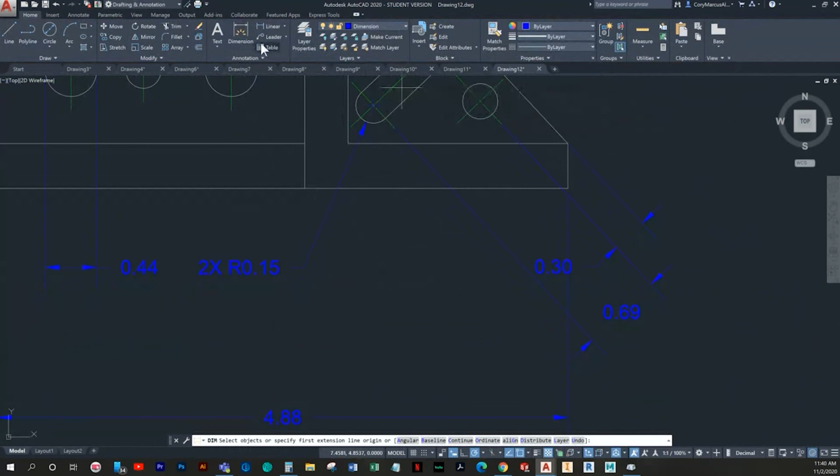Then we will dimension this. That's going to be 4 times.

Now granted, we ended up with quite a bit of room, so I'm gonna play with these. I thought maybe we had some more dimensions, but I like to keep a little more breathing room between left side and right side stuff. So like, when you're looking over here, you see this, but you kind of ignore this guy. And this has decent enough space, so that should be fine. Yeah, that's pretty much it for that one.

So up next we have exercise 10. It's also inches. We'll start with 4, 4.

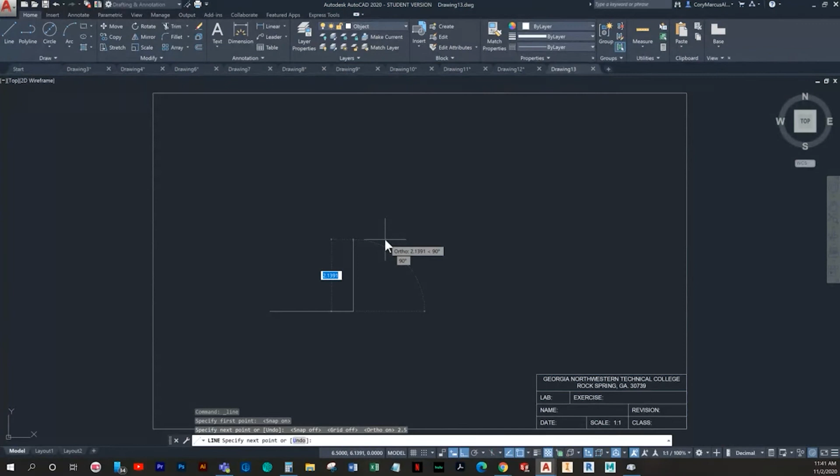All right, so what we're given here is the part that, you know, they've clearly got ladder dimension, and there's gonna be a lot of offset. So I'm gonna draw a center line here. That's what this is. Obviously, I'll replace it with an actual center line later, but for representation's sake, I'm gonna draw it out.

Okay, so first we have 0.5 to the outside both ways, and I need to change my layer. Okay, so I can go ahead and close it. This is the outer shape.

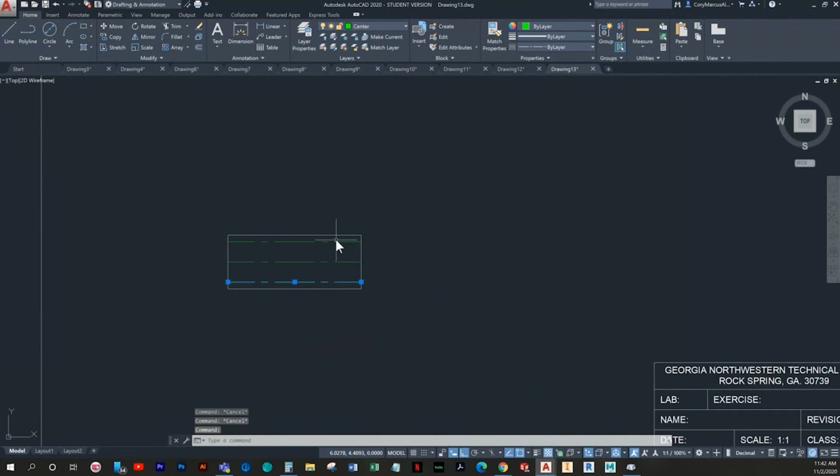So then do 0.75 divided by 2. Get our next set. Then we're going to go ahead and offset one more time, 0.25.

One pain in the butt part about using the center line there at the beginning. But that's a little convoluted, but you get the idea. We've got our 3 different sizes. Then we'll do offset of 0.5. Offset of 0.63. Offset of 0.88.

And we don't need the rest, so now we can just trim. So we know this part is the thinnest. We know that this is here. We can kind of just quickly trim, and we'll clean up the rest in a minute, obviously.

Okay, so this portion, you know, is full size. You know that this portion is that. Yeah, now we're starting to get a little something. We can delete this, that guy.

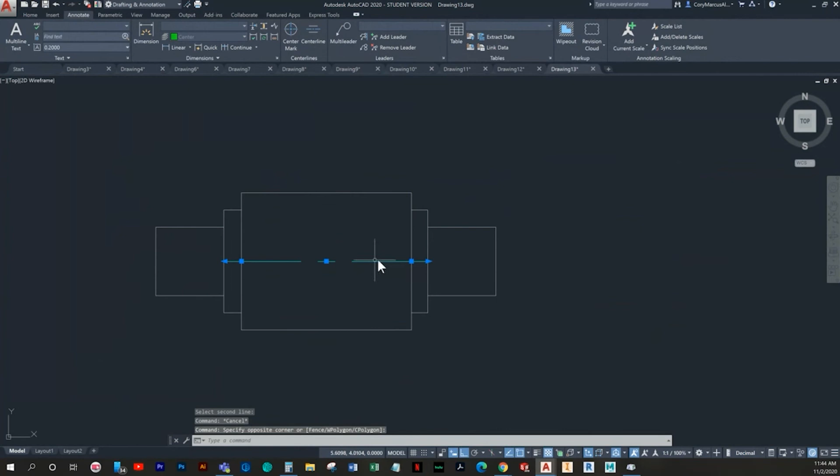Let's add in our center line the proper way. Adjust the grips. Alright, now we can go ahead and detail it.

You may be thinking, how are we going to get that weird looking bracketing in those arrows? We'll get there. But we'll go ahead and do the baseline dimensions first. We're actually going to use that command this time, because why not, you know?

So there's the 0.5. And it looks like we can get away with 2 decimal value precision, so we'll go ahead and change that again. Alright, so baseline, just going to go through, click the rest of these. There we go. Okay. Obviously, that's pretty quick once you get the hang of using the tool.

Unfortunately that one doesn't quite fit, but it's fine. If you notice it doesn't have the diameter symbol in there, we're going to go back and actually add that.

So before I mentioned, you can go through and hit other and find more, but you can also find diameter in here. So you can either click it and then click out, or you can even type in, hold shift, type percent and C, and it'll automatically convert it. That's pretty cool too. So it depends on your preference, but I do kind of like percent C.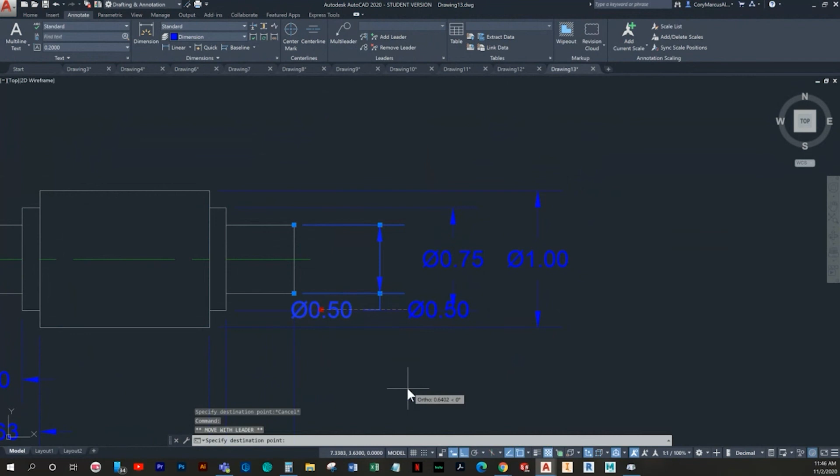So we'll do a different one now. Move with dim line? No. Move with leader. There we go. Okay, so basically what I did was I reoriented it using that. Then I'm going to space these out a little bit, something like that, just because they're on top of each other. You want it to be kind of legible. Not that this is super legible actually, but now it is.

Now for the tough part, huh? Really not too bad actually. So you get this little guy if you choose in the drop down from dimensions. I think it's called datum identifier. Okay, tolerance. You get this, and basically what you're doing is you're actually building tolerances in whatever form you need.

So in this one, we've got 0.012, and then we've got... I didn't mean to choose material condition. I want one, if you can choose to not have it. There we go.

So somewhere in here we should have a spot to choose our actual datum identifier. Let's see. Oh, right here. Okay, so that's going to be B. And I need to choose a location.

That didn't work out very well. I think there's a way to do that where it actually puts the arrow on it, but we'll see. Either way, I don't like that it's currently showing down here.

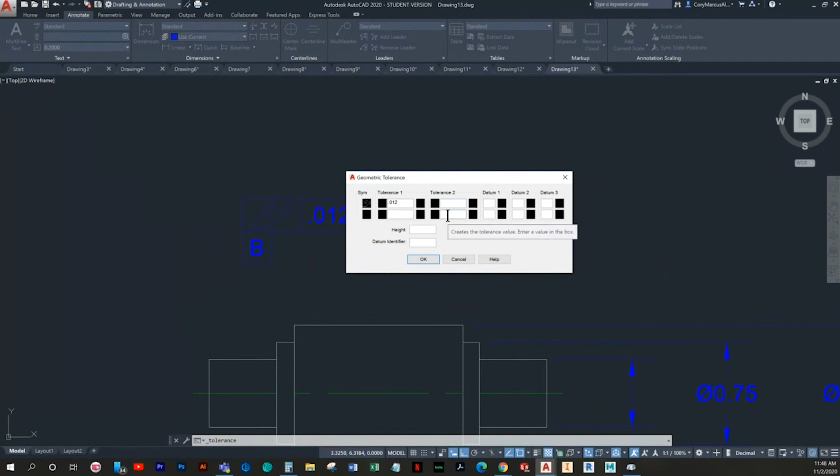So we'll do that again, choosing our symbol, typing in 0.012. In order to keep it how it is, it might be easier just to put it over here. Let's do that. There we go. And I guess we'll have to add a leader somehow. Let's see.

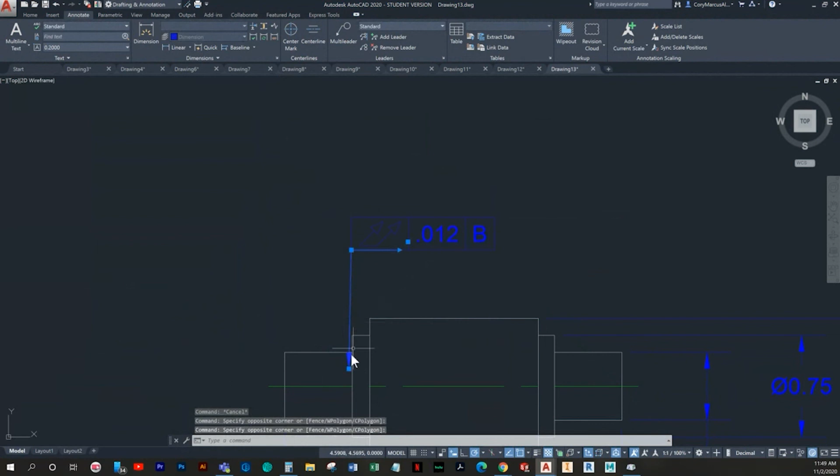I was hoping to be able to snap it. Let's see. Okay, yeah, cool. Okay, so it didn't stay together, but I can't say I use these a lot. Basically, I chose a leader and I chose a point on it. That's fine, it's still not perfect, but if you want it to be positioned a little better, there's probably a better way. And if you have one, definitely post it in the comments. I'll gladly do a rectification of this.

So next we need a special leader style to do those little flags. So I'm going to hit new to copy the current one. We'll just call it datum identifier. And we've got to change a few things. That's okay, I'll rename it in a minute.

So datum triangle filled, we need to change. We need to cut off the landing, and then frame the text. I believe that's it. There we go.

Alright, so let's close this. And I'm going to make sure datum identifier is on. Choose this endpoint. Actually, you know what, you have to choose above the endpoint because we're kind of doing this in a wonky way, but it works out pretty well. Actually, I was wrong again. So go up from it to the right. Make sure you get that 90. Dang it.

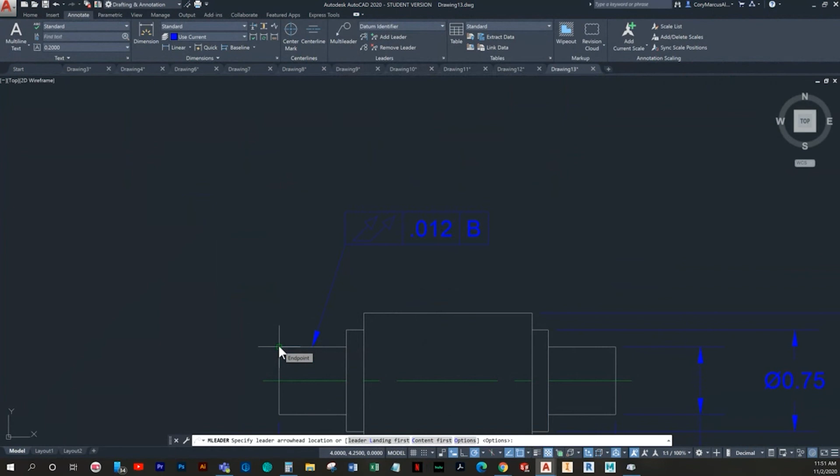Oh, you know what? They just do a random line. That's why - it's up to you if you want the line. I'll do a line just for the sake of explaining. So we would have like a half inch line, and then we would have a leader that starts over here, next to there. I would type in A. Here it is from this end.

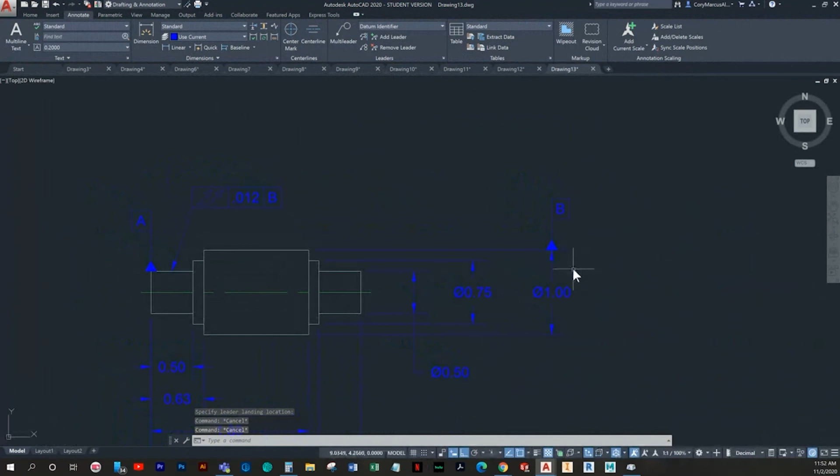Where is my fill? Yeah, where is this guy? Okay, we'll do this one more time. That's fine. Apparently it doesn't like it if you do it the other way, so we'll just have it like that - not that I like it. It's ignoring me whenever I try to do it from the line that I made. So then we'll do from here, B. It's just hideous, but that's fine. I'm really surprised it doesn't work with a line. I'm going to try that one more time, just out in space here.

What? Now I did it. Okay, fine, we'll do this one more time. I refuse to do it that way. To 0.5. From this guy, 0.5.

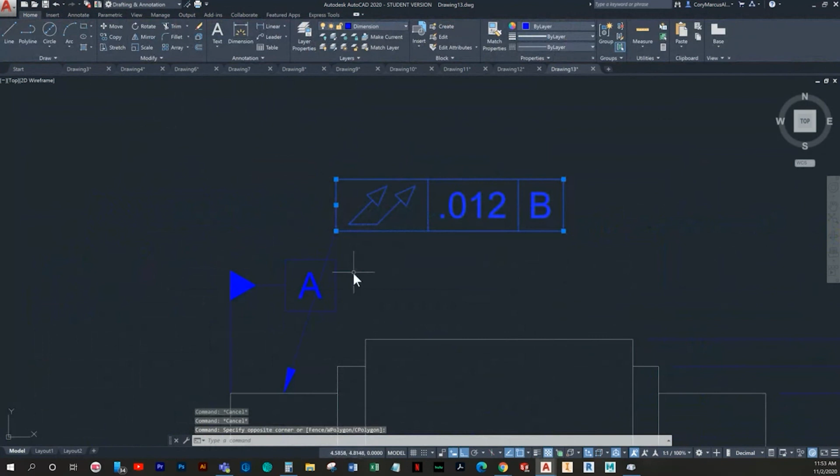Maybe it needs more room. Yeah, okay, so you can see when you pull it, it starts to pop up room. So you've got to have enough area for it to actually squeeze in. Okay, learning experience, you know? Alright, so there's those. And let's see if we can't flip this. Heck yeah, okay, so we flipped it. Gets it out of the way. Alright, so that's it for that one.

Let's do exercise 11. Looks like this will be the last one. Metric. So we'll start at like 100, 100.

It's going to be 86 overall, 56 the other way, so we'll just do 43 and 28. So there's our ellipse. And then from that center, our circle starts here. It's a diameter of 36. And we've got a hexagon.

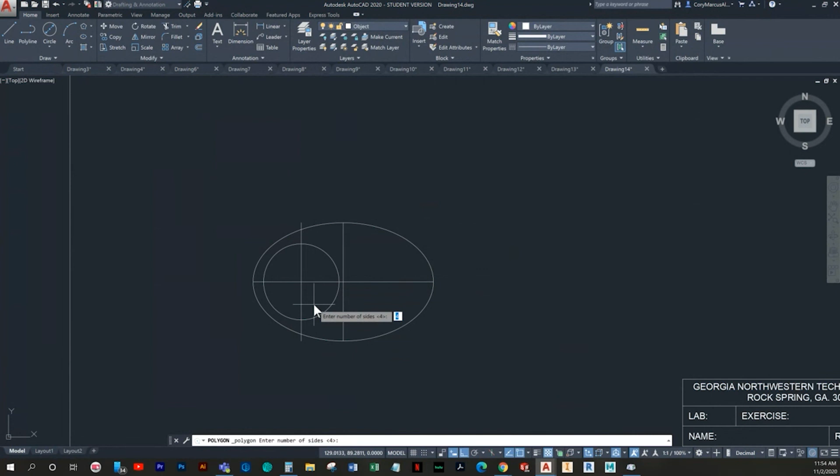Oh, I was looking for the option. I just had to choose the side still. Okay, so we've got the center. And then we're looking for circumscribed or inscribed. So what it's showing is a 20. So basically that should mean that this is circumscribed, because the flat is what's tangent to the circle. Like in this case, that would be 20 - it might be inscribed.

That's okay, so let's just try and see. It is inscribed. I'm not gonna lie, I still get them confused. Basically, what it means is one of them is inside the circle, and one of them runs the circumference of the circle. But in this case, we actually need one that's inside. The match is 20. Son of a biscuit eater.

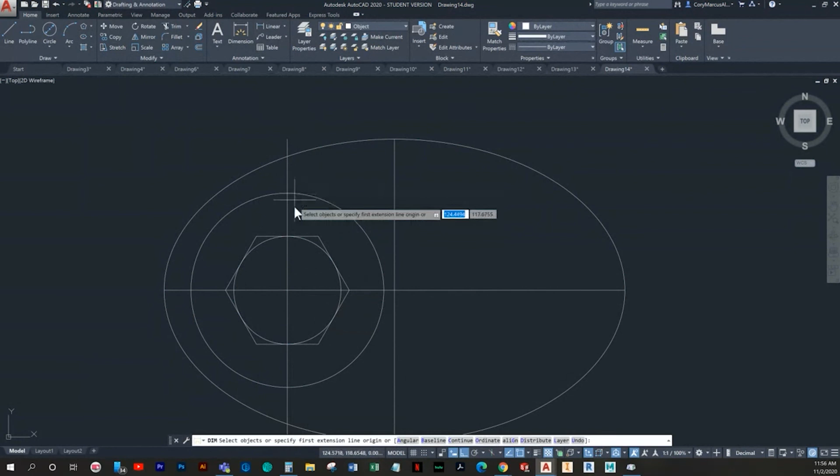Maybe it is circumscribed. Heck, let's just draw a circle in here, easier to be safe. Okay, 6, center point, circumscribed, there. That should be 20. Okay, so I was right to begin with - I was just doing some user error there. Guilty.

Alright, so then from the bottom quadrants of these ellipses, draw a circle with a radius of 47.5. That's going to be where the circle passes into this area.

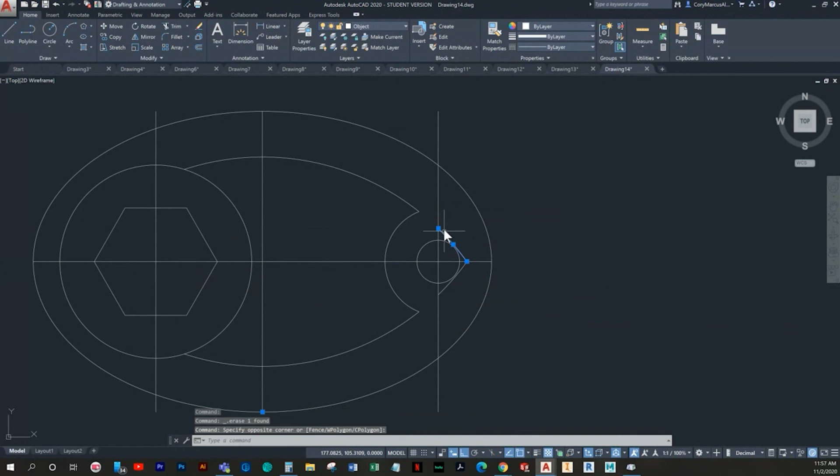Just going to trim part and delete the rest. Okay, and then from this center, that's where the next circle will be - a diameter of 8. And a radius of 10. So we can go ahead and trim this portion out, the circles from earlier. Delete this, this - you can actually just start to delete all kinds of stuff, just to simplify a bit.

Alright, so next let's put in some tangent radius circles. So we have one here and here, they're going to be 6. And same for here. This side on the wrong side. Weird. There we go - sometimes you just got to choose the right part first, you know.

Alright, so then we need ones that are a size of 3 here.

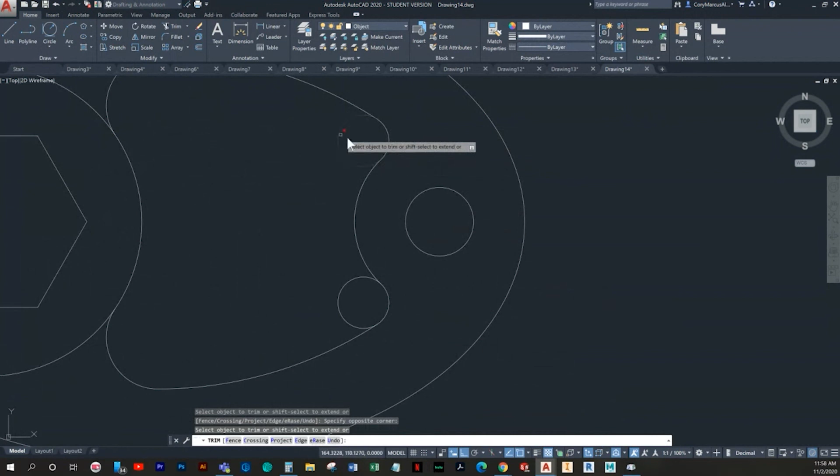And yeah, so now we can put in our center marks and detail. I don't think it'll work for a regular one of these, unfortunately. I wonder if we can do a center line on it, though. Nope. Okay, so this is one of those times where you don't really have a choice - you just gotta manually draw in a center mark.

Is this metric? Yeah, so let's do 1.25. Usually it's 0.125 roughly, I believe, so metric we'll just do 10 times that. So we'll do 1.25. We'll just grab this grip and shift it over. We'll do the same here.

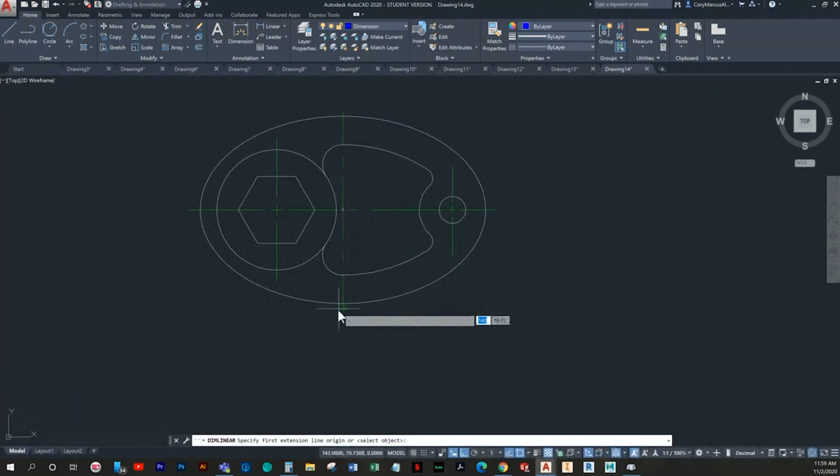Alright, let's dimension this bad boy. We've got 20. 33. 36. 20. 56.

I'm gonna put this one right here - seems like a decent spot. Make sure to put your 2 times in here. Oh. Okay.

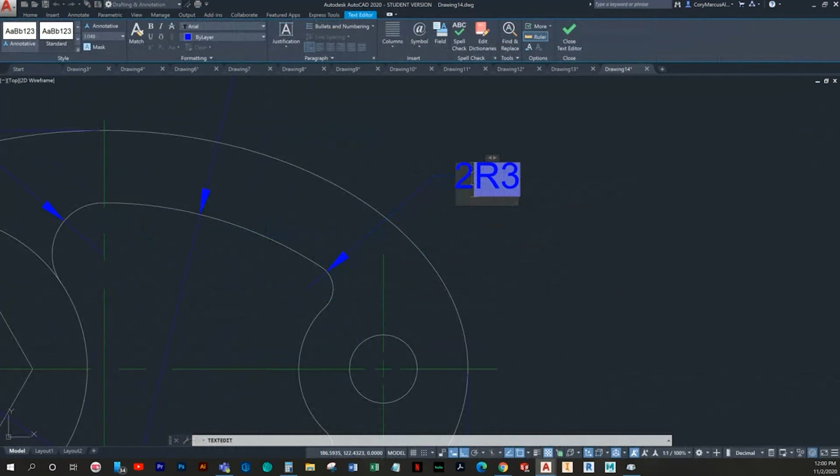Okay, so then we've got this one, which is also 2 times. Two times. Yeah, I'm just going to put these on the outside because I don't know why. This one, I guess, is a little easier to put.

AutoCAD's kind of finicky with placement, but okay, so I believe that's it. Let me just double check.